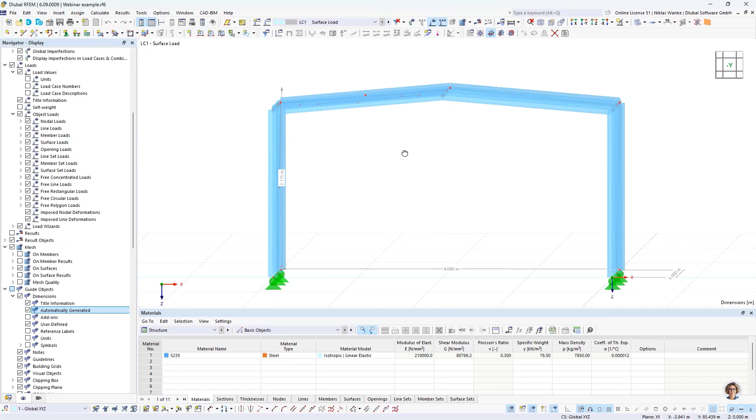Okay, now we can switch to the program, RFEM 6. To show you all possibilities of load transfer, I have prepared a really small and simple model of a small steel hall. We can also have a look at the dimensions really shortly. It's a really small hall, 4 meters by 5 meters — maybe you can park your cars under it or something like that. The hall has a height of 2 meters, and the roof has a little pitch.

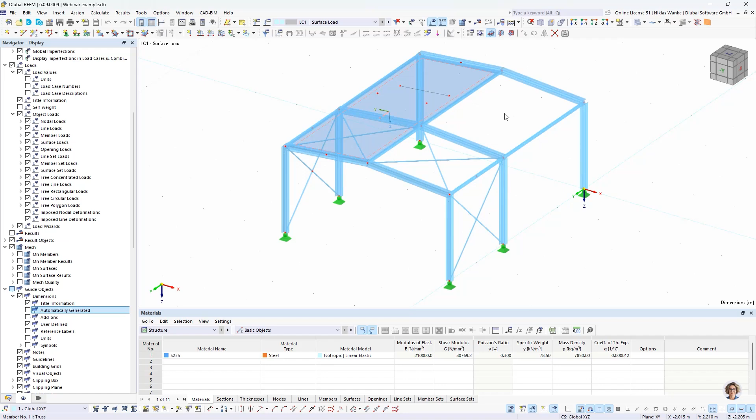The height difference is 1.75 meters between the middle and the rim of the hall. As you can see, I already created one surface for one half of the roof, and this is already a load transfer surface. For the second half of the roof, we will model this surface together so that you can see the process of modeling it.

For that, I will choose the option New Surface with the option Select Boundary. Now we are in the surface dialog, and first of all, we have to select our stiffness type.

This is where the magic happens, because here you can select the load transfer surface, and that's exactly what we want for this webinar.

An alternative would be to select another stiffness type, for example standard stiffness. Then you can create your thickness and your material, and in this case it would be possible to activate the option Activate Load Transfer. This way you can consider the stiffness of the surface, but also do the load transferation.

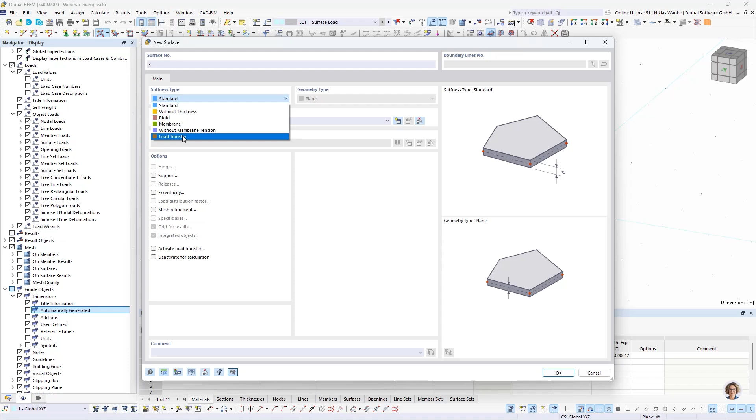But for this example, I would like to choose the load transfer stiffness type, which means that we don't apply any stiffness to the load transfer surfaces, just do the load transfer. As you can see, this option is in this case automatically activated.

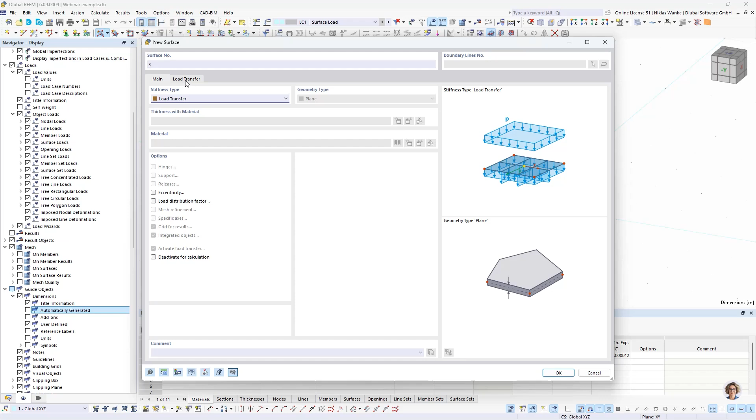By choosing the load transfer stiffness, we get an additional tab, and this is where we can make all our settings for the load transferation.

First of all, we want to have a look at the categories area. The first setting is really important: this is the load transfer direction. Basically, we offer two different methods of load transfer for the surfaces.

The first method is called isotropic FEA, and the other method is called the stripes method. These two methods work completely differently, and we will have a look at both. But first, let us select the isotropic FEA method.

I want to give you a small explanation about how this method works, and for that we can have a look at this picture at the bottom right of the dialog, because in this picture it's tried to explain how this method works.

So this first picture is what you see in the main model. You have your load transfer surfaces, you have probably a connected member or other connected objects, and you have your applied load. In this case, it's a surface load.

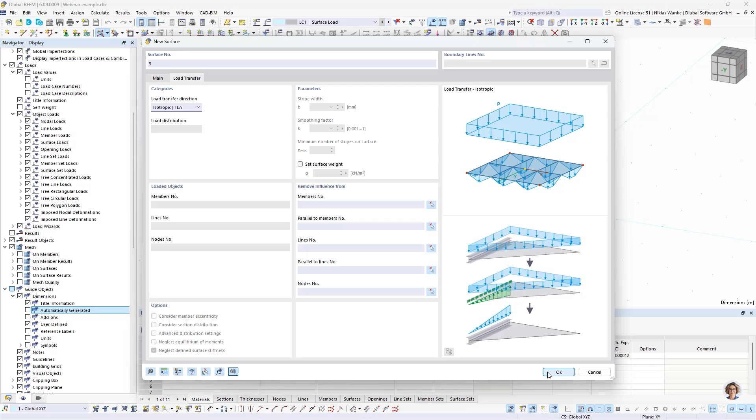And then we have to select our boundary lines so that the surface will be created. So that is done.

And now, of course, we also have to apply a load, because without load we would not see anything. Therefore, I create a new surface load. I want to have a load magnitude of 1 kilonewton per square meter to keep it simple.

And the load direction should be in global, set on projected area. We can apply this and select the loaded surface, which should be the right load transfer surface of our roof.

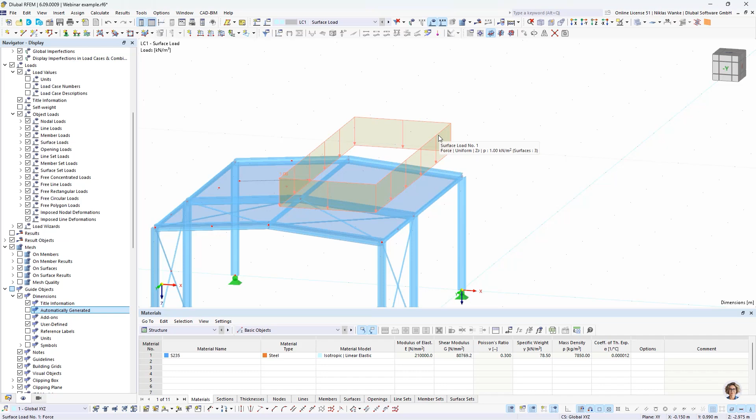Okay, now we see the defined surface load, but basically that's not the visualization or the load that we want, because we want to transfer this load to the connected members.

And to see how this load is transferred, we have to change the visibility a little bit. So we will go to the navigator display, and you will find the setting under Model, Surfaces.

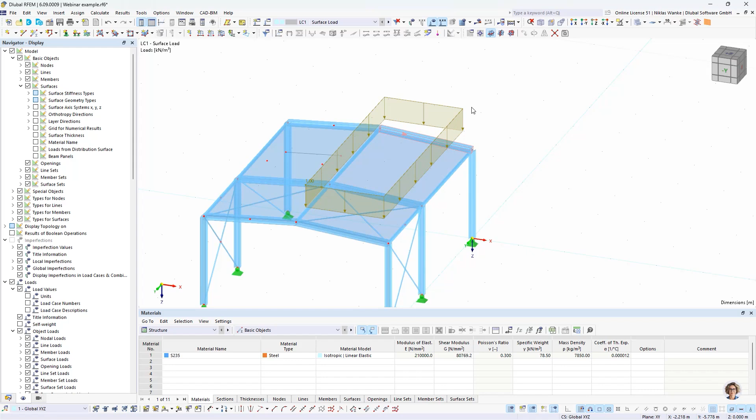And then you can see there's the option Loads from Distribution Surface. And if we activate this option, then we will already see the distributed or transferred loads, and not the surface load that we can see at the moment.

So I will activate it. Okay, we don't see anything. Why is that so? Because the submodel, which I talked about, has not been calculated yet. So to start this process, we have to start a calculation of this load case.

As soon as I start the calculation and the solver starts, you will see that there are two separate calculation processes. That's a hint, because the first calculation process is made for the submodel, and after that we do the normal calculation process for our main model.

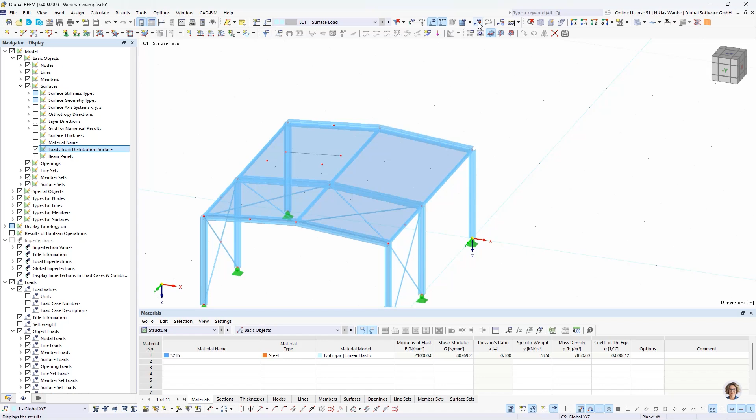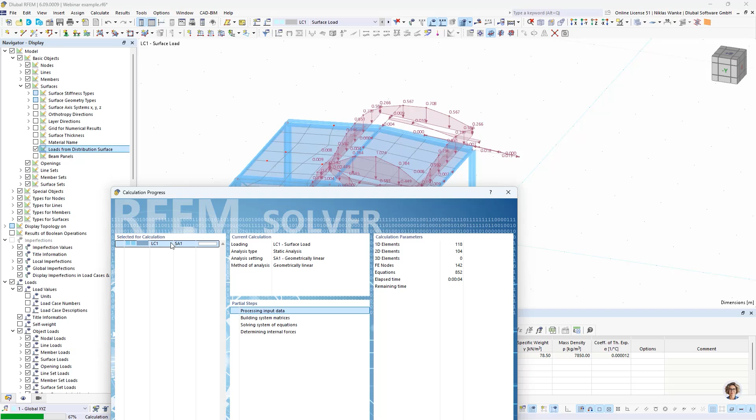So I hit the calculation button. Now the mesh is generated for the submodel, and now the structural analysis or static analysis is done for the submodel. If it's finished, we should see loads - that's the case now. And now the mesh is generated for the main model, and the static analysis is done for the main model. After that, we will receive our results for the main model.

So I think it's clearly visible in the solver that the submodel has to be calculated first, so that we receive these transferred loads.

In this case, also my horizontal bracing has received some loads, and probably that's not the thing that I want. But that's not a problem, because we can simply deselect these members to be loaded. For that, we go back to the load transfer settings.

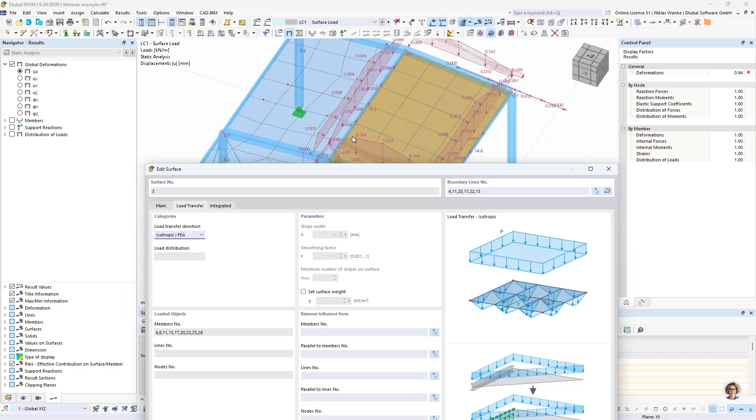Here we can select in the middle part of this dialog which objects should be loaded. By default, all members, all lines, and all nodes which are part of the surface - these are integrated objects and connected objects - all these are loaded by default. But we can remove the influence of some of these objects.

For example, I will choose the members of my horizontal bracing. By clicking OK, we of course have to calculate again, but then these members won't be loaded anymore.

It's also possible to select one member and all members which are located parallel to the selected member, and then you can remove the influence from all these parallel members. Same is for the lines and parallel lines and for the nodes.

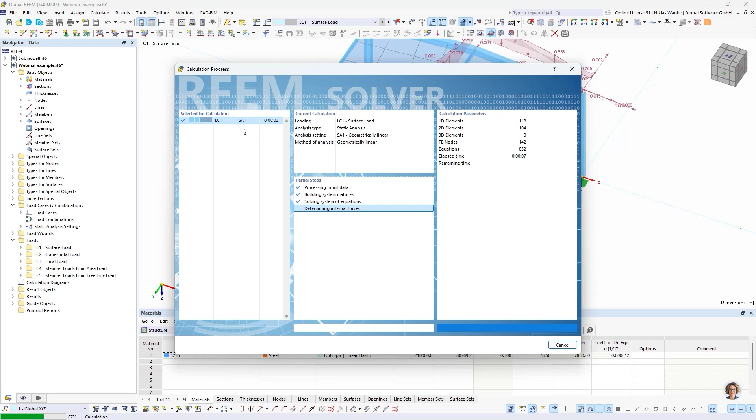Okay, let's calculate this again. And here we see again that it's calculated two times - first time for the submodel and second time for this steel hall model. That was the first time, and now the steel hall is calculated. And now it's finished.

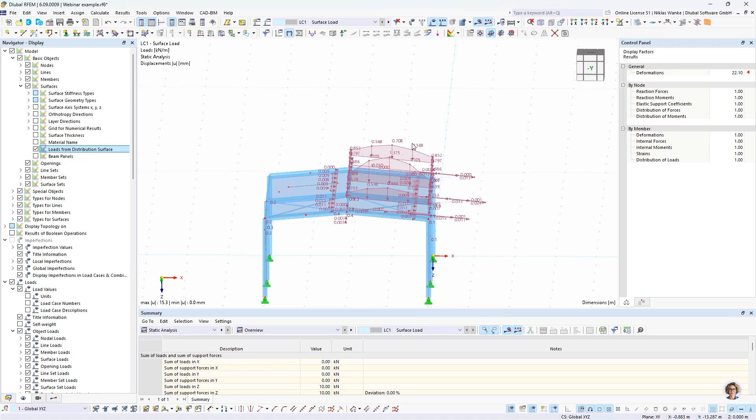Okay, so now we received our transferred loads. I can also switch back to the original load, which is the surface load, and switch back to the transferred load. In this case, we only have member loads. The main load is a vertical load as expected, and we have some small effects which result in horizontal loads.

Most likely you don't have to pay any attention to these loads because they are really small, like 0.001 or 0.02. So that is just an effect of the FEM calculation.

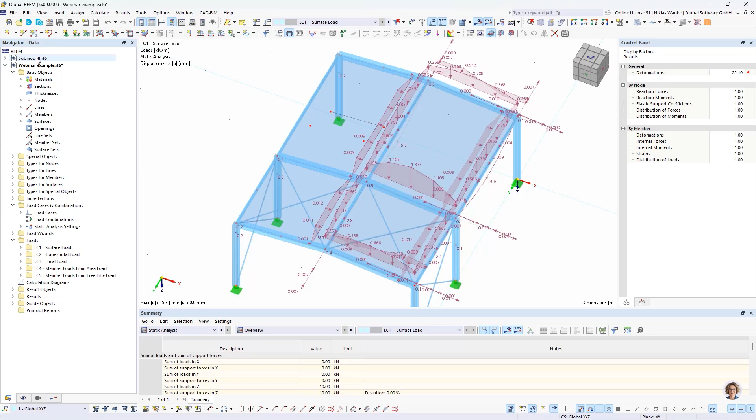Okay, I would like to show you the submodel as well. I prepared this in a separate model of RFEM 6. So I just created the submodel of this one load transfer surface. As you can see, we also have the roof pitch, we have the surface load on the surface.

In this case, the members, as I said, are now modeled as fixed supports. The definition of the surface is a bit special, so it's not a complete rigid surface, but it's a surface with the stiffness type standard and defined stiffness matrix.

So let us have a look into the stiffness matrix. We will see that the different stiffness coefficients are set to a relatively high value, like 1e+10 or 5e+9, or maybe here also 1e+11. So this is a really high stiffness, but it's not a complete rigid surface - it still has a finite stiffness.

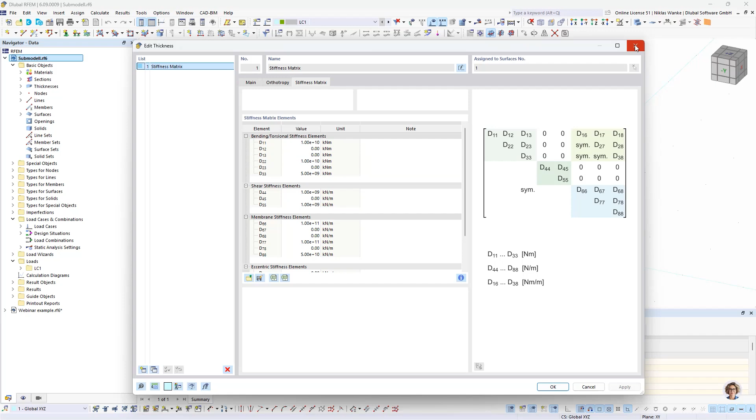The reason for that is because this leads to a better result or to a better load distribution. So that's why this load transfer surface is set to this stiffness in the submodel.

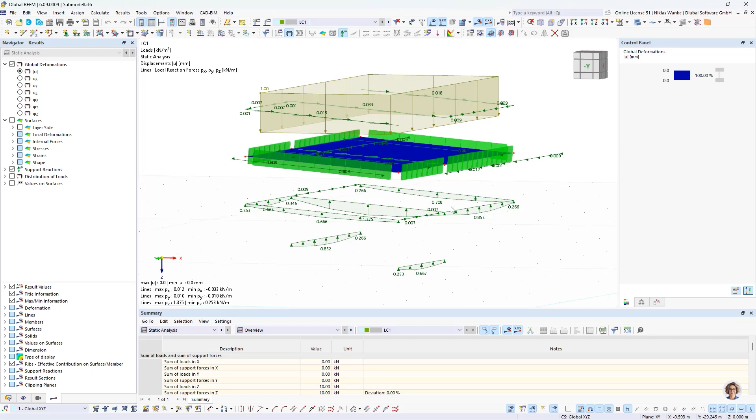And if we calculate the system, then we will receive the support reactions of these fixed supports, and this will be exactly the load which is applied in our main model. So for example, we can remember this value here - this is the peak value of the middle rafter.

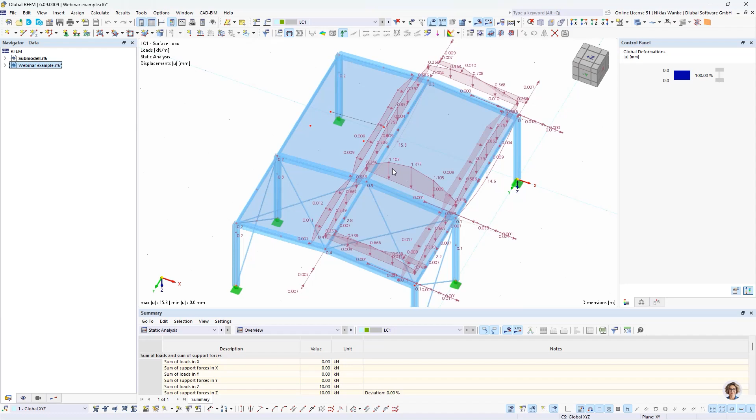So in this case, we have 1.375 kilonewton per meter. And if we switch back to our main model, we will find exactly this value, which is 1.375 kilonewton per meter. So yeah, with that, I think we have proved that it is the same.

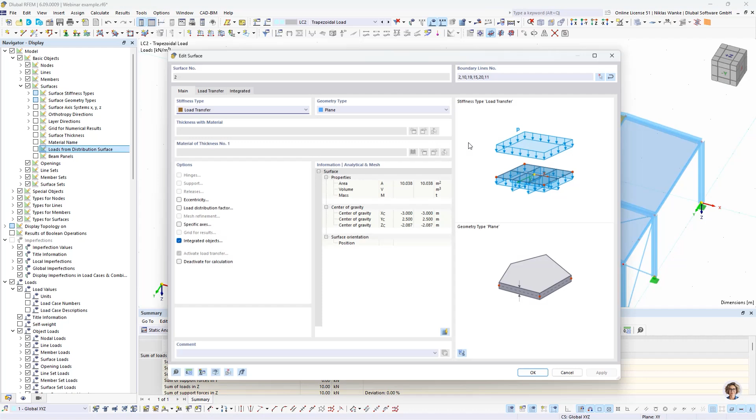Okay, so let's go back to the definition of the load transfer surface. This time we will have a look at other methods, which is the stripe method. Therefore, I will go to a new load case, the second load case, where I defined a trapezoidal load for the left side of the roof. Let us have a look at the load transfer surface, which I have already defined.

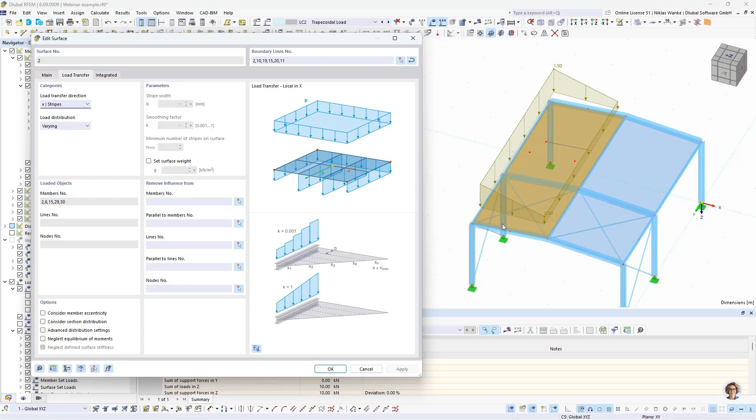So we go back to the tab load transfer. And in this case, we see we have defined X stripes. This means that the surface is divided into many stripes along its local x-axis. If we strive over with our mouse, we can see the local x-axis is located in this direction. So the surface will be cut or divided into many stripes, like I am showing with my mouse. You can imagine it like if there would be many single beams lying in this direction on the roof, and every one of these stripes is loaded with this trapezoidal load. Always if such a stripe cuts a member, like these rafters or the horizontal bracing, then these members will be loaded by the stripe.

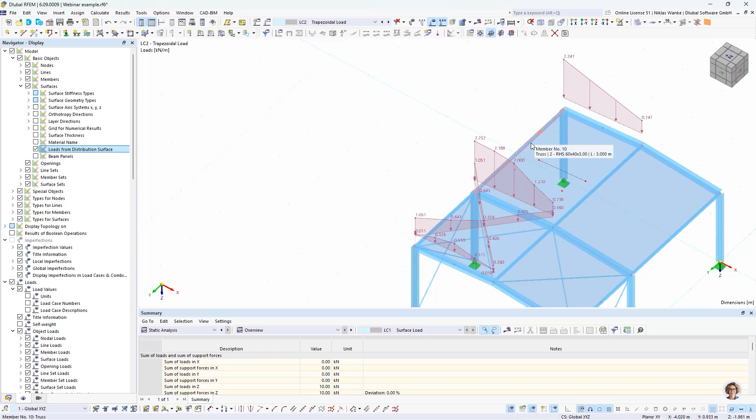So I will go on. First, I will select the loads from distribution surface so that we can see the result of the load transfer. As we see now, the horizontal bracing is also loaded and our rafters. What is not loaded is the purlin of the rim and of the middle. The reason for that is because the purlin is completely parallel to the stripes direction, so it does not receive any load. If we change the stripes to Y stripes, then the purlin should be loaded and our rafter should not be loaded anymore. So I will change it and apply. And now we see the purlin is loaded, but the rafter is not loaded anymore.

So these are the two options that you have to divide the stripes in X or Y direction. And the third possibility would be to mix these two stripe directions. So in this case, you have X and Y stripes, which is basically a mix of the two methods. If we select it, you will see that now all members, regardless of their direction, are loaded.

Another option that comes with the stripes method is the load distribution. Normally it's set to varying, but it's also possible to set the load distribution to uniform, and in this case you will always receive a constant load distribution on any object. So if I set it to uniform, we will see that this linear load distribution will change to a constant load distribution. In some cases, this can be an advantage to keep the system a bit more simple, maybe also to prove it easier if you calculate it by hand. But of course, the load distribution varying would always be the more exact method.

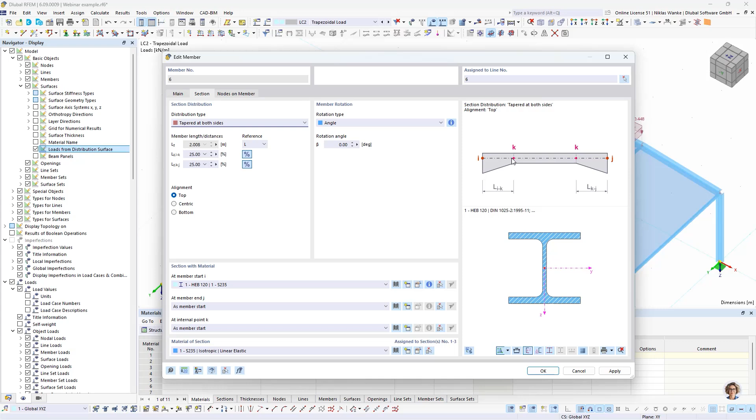So in this case, the axis would have a little pitch. This can lead to small differences between the load transferation, but the difference should not be too big for most cases.

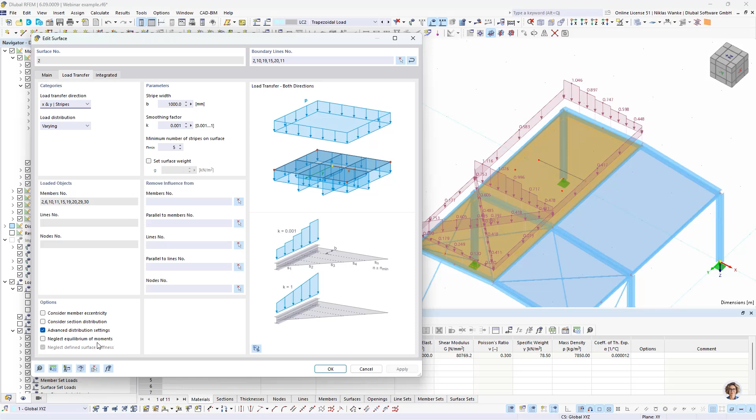One last option is the option neglect equilibrium of moments. By default, the setting is deactivated, which means that the equilibrium of moments is considered. I can show you that in my third prepared load case. Here I defined some local loads on our load transfer surface. I have two nodal loads, and I also have a free line load and a free rectangular load.

This could probably happen if we have, for example, air conditioning on the roof, or if there are some pipes which are connected with the roofs. So these could be cases where we have such types of loads on our roof. And of course, it's also possible to transfer these loads which are applied on the surface to the connected objects like these members.

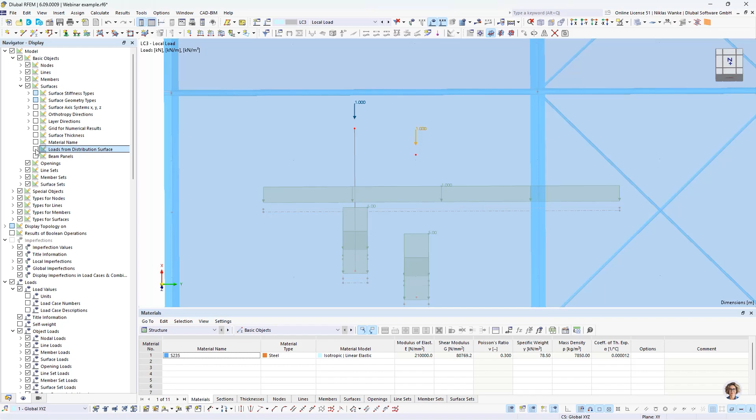Normally, the equilibrium is considered. This means, for example, for this load, it's located at 2/3 of the span of this roof. So it would mean that 2/3 of the load would go to the right rafter, and 1/3 of the load would go to the left rafter. This is the case, as you can see. Here we have one moment.

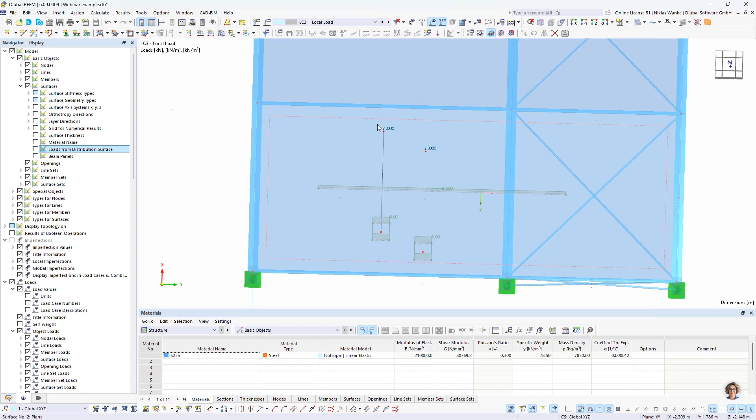Same is for all other types of loads. But now, if I activate the option neglect equilibrium, then the equilibrium does not matter anymore. So what does it mean in detail?

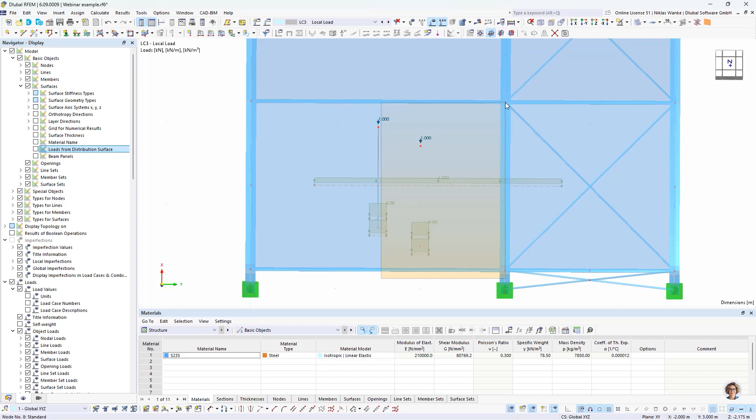It means that now you can imagine there's a cut done in the middle of this span between the left and right rafter. Every load located on the left side of this cut will be transferred to the left rafter, and all load located on the right side of the span will be transferred to the right member. This would mean, for example, that this free rectangular load, which is completely located on the right side of the span, will be completely transferred to the right member. So that's different to the case before.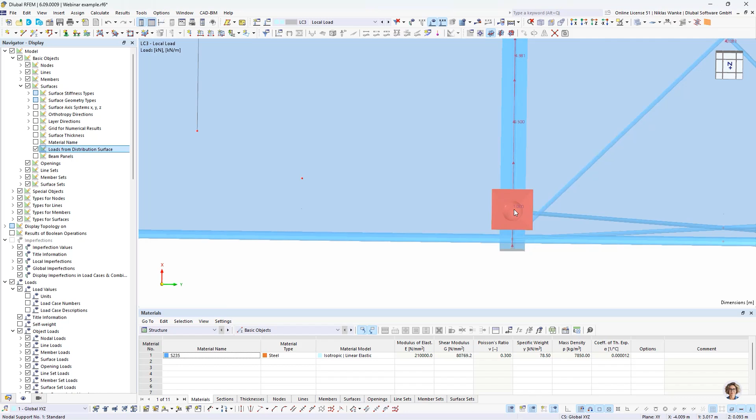If I activate the load from distribution surface, we will see this. Now we have the complete load on the right rafter of this rectangular free load, and on the left side we don't have any load in this case. If the load is located completely in the middle, then it will still be like before, so we have half on the right and half on the left.

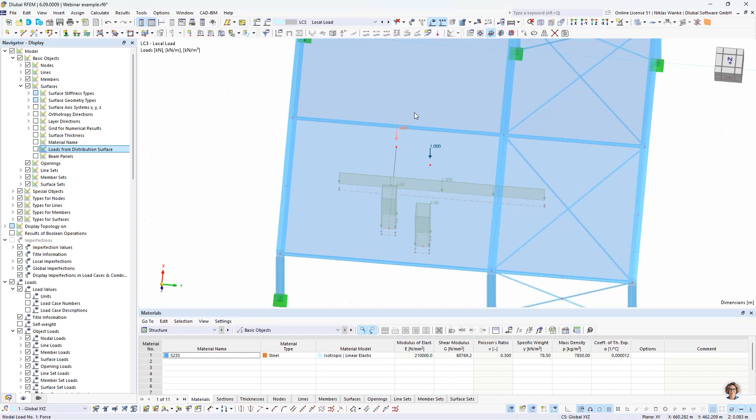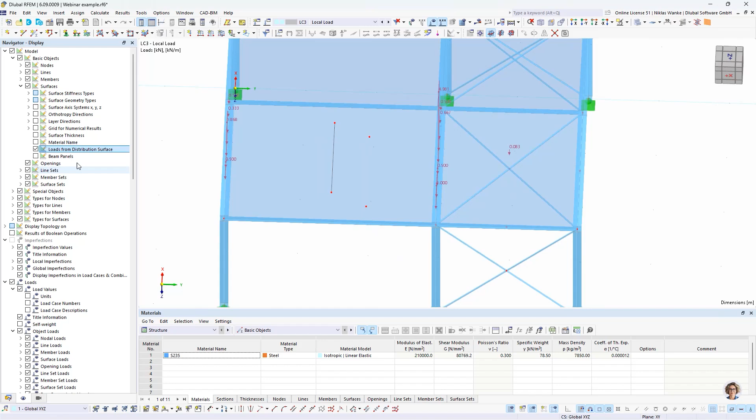There's also one special case, because for these loads, which are nodal loads, the equilibrium is always considered correctly, also if the option is activated. So also for this load, which has eccentricity to the middle of the span, the loads are still distributed 2/3 and 1/3. But for all other loads, the equilibrium won't be considered anymore in this case.

I just remembered one thing that I would like to show you again. By now, we always only transferred the surface load on this load transfer surface to members which are connected to the surface. But I would like to show you that it's also possible to transfer it to lines or to nodes, like shown here.

Now it's not transferred to these objects. The reason for that is because these nodes and this line are no structural objects. It's just geometry, and it does not have any stiffness or something like this. So that's the reason why the loads are not transferred.

But if I, for example, put such a nodal support on this node, then it will instantly also receive a load. Same is for the line. I could put a line support there, and then we will see, okay, now also the line has some loads transferred to it.

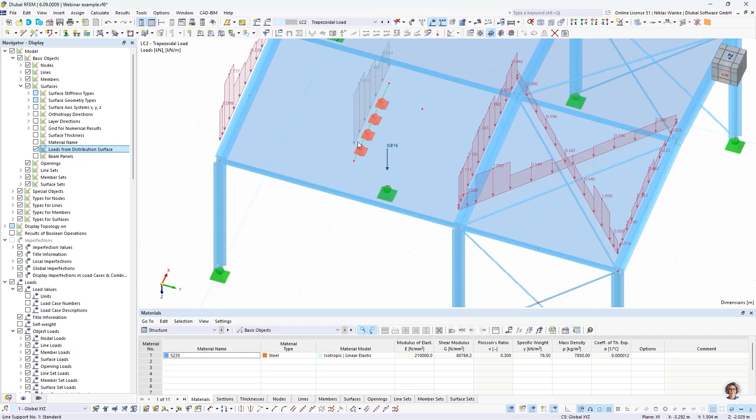Of course, that's also possible, for example, if you have a wall which is connected to the load transfer surfaces in this line, then also the wall will be loaded. Same for the nodes. If we put a column on this node, let me do it really quick, then also this column, of course, has a stiffness and will be loaded.

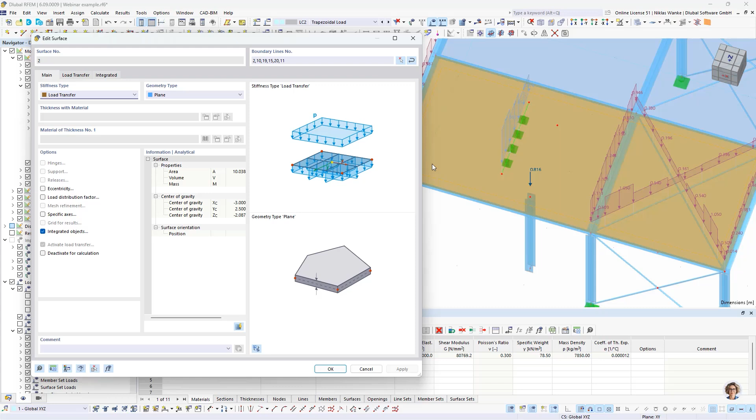One thing you have to keep in mind is that only the load of the stripe which the node or the line is directed in will be transferred to the column. This means if you select the stripes method in this case, it really depends on the stripe width. Now we have a very big stripe width, we only have 5 stripes, so the column is getting a relatively high load.

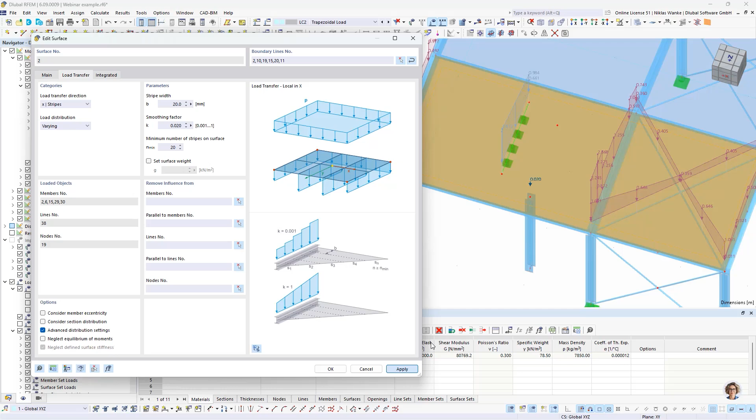But in the normal default setting, let me change it back to the default setting, we only have a stripe width of 10 millimeters, and this means that the column will only receive a really small load. If I press apply, you see now it's only 0.02. And if I double up the stripe width, we will receive the doubled loading, which is 0.04 now. So that just means that the stripe width has a big influence to the loads on columns in this case.

This is why I would recommend to use the isotropic method if you have some structure like this.

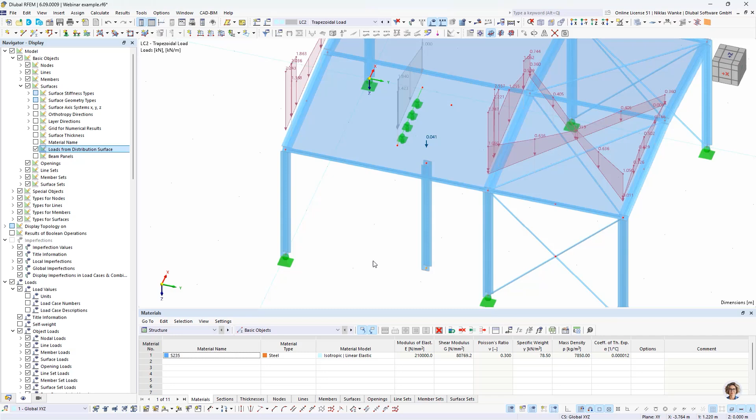Okay, let us remove the column and the line support, because in this case it would not make much sense to have a column here. And now we are back to the default system.

One last thing that I would like to show is that load transfer surfaces can also be used for other geometry types, so you don't necessarily need a plane surface. You can also use curved surfaces like quadrangle. Load transfer works the same, and it's still possible. And I think that's a really handy feature and a big advantage.

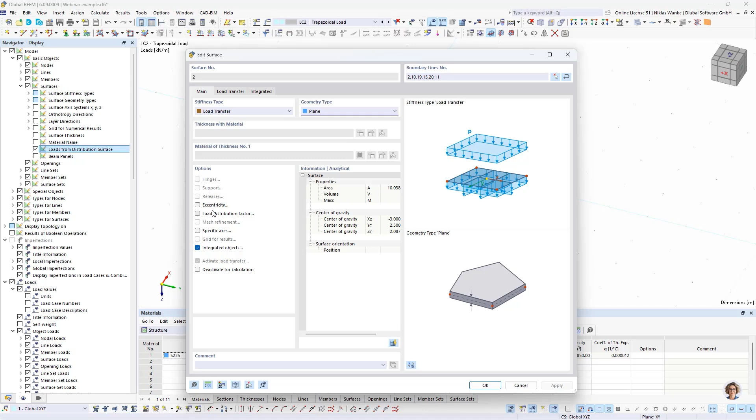And the other thing is, that's basically the last thing I want to explain for the load transfer surface. This is the load distribution factor. That's an additional option for the load transfer surface, and if you activate it, you can define load distribution factors if you want.

So by changing the factor for some members, for example, I can say this member should receive a higher distribution factor. Maybe we choose 1.3 or something like this. Then we will see that the transferred load will increase. So I have to apply it, of course. And now you see the load has gotten bigger.

Be careful a little bit with this function, because if you increase or decrease the distribution factor, you will also increase or decrease the sum of the loads. So you will receive a higher surface load or a higher load at all. This means that you increase the absolute values of this load, and it's not relative to the sum of the loads.

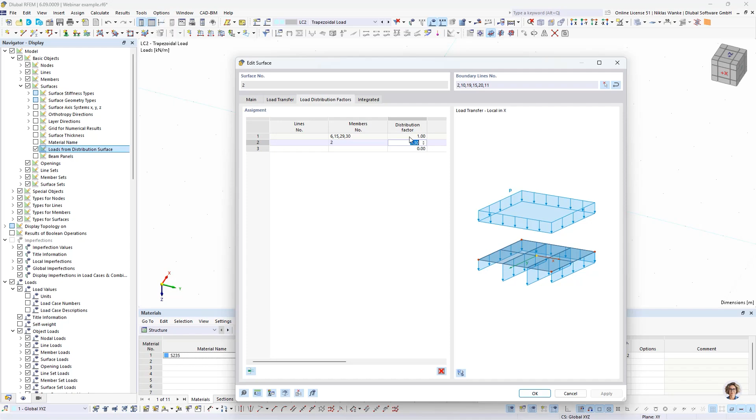But it's, in my opinion, also a really useful feature if you want to kind of manually have an influence on the load transferring. Okay, that's already everything I wanted to explain for the load transfer surface.

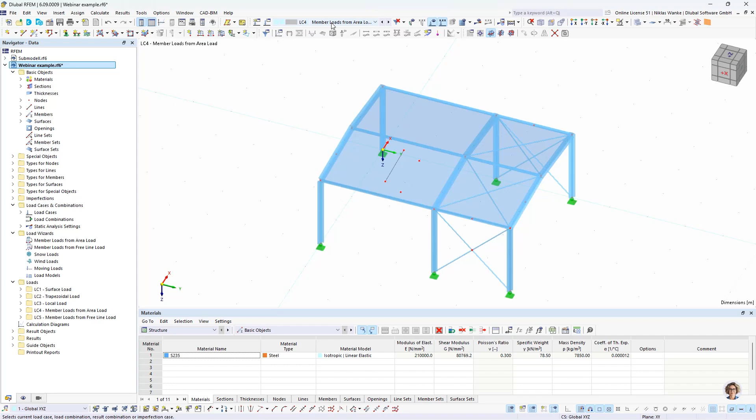And as I said at the beginning, we also have two other points we want to have a look at today. This is the two load wizards: member loads from area load and member loads from free line loads. To show that, I will switch to load case 4 that I already have prepared. I want to use just this load case to show you the first load wizard, member loads from area load.

For example, we could imagine that we want to apply member loads from an area load, which is the result of a wind load on our steel hall wall. Therefore, we can create a new load wizard by double-clicking here, or by right-clicking and selecting the option New Load Wizard.

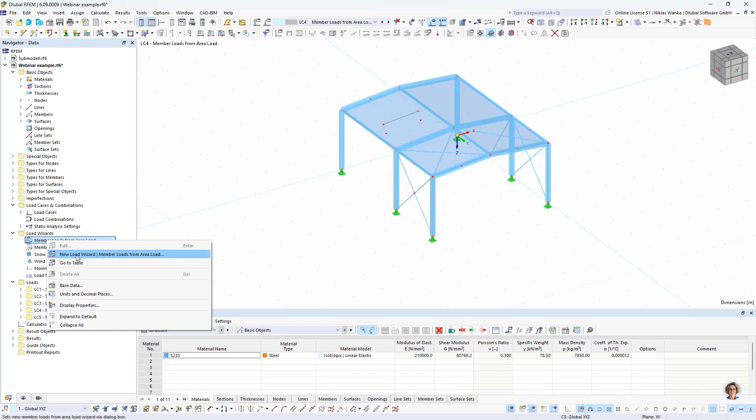Now we see the dialog for the definition of the member loads from area load. This load wizard has an advantage: we don't have to manually define our surface, like we had to do for the load transfer surface. So we don't need any surfaces at all. That's especially an advantage if you are working with RSTAB, because there you don't have any surfaces available, and you can still use the load wizard member loads from area load.

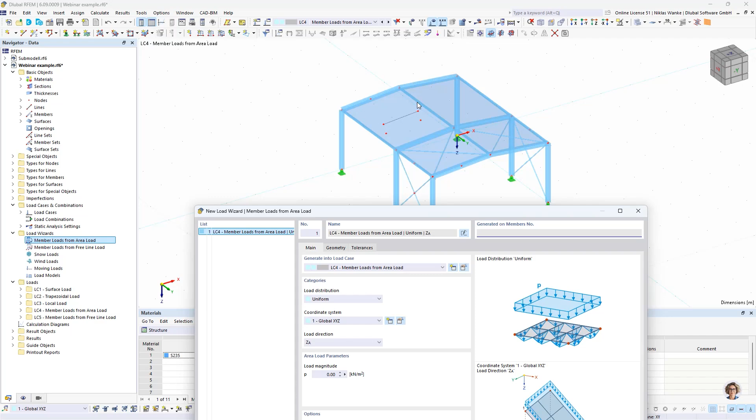The disadvantage of this load wizard is that you can only apply surface loads. For the load transfer surface, you have seen that we can also apply, for example, nodal loads and free loads, so we can apply every type of load to the surface. For the load wizard, only surface loads.

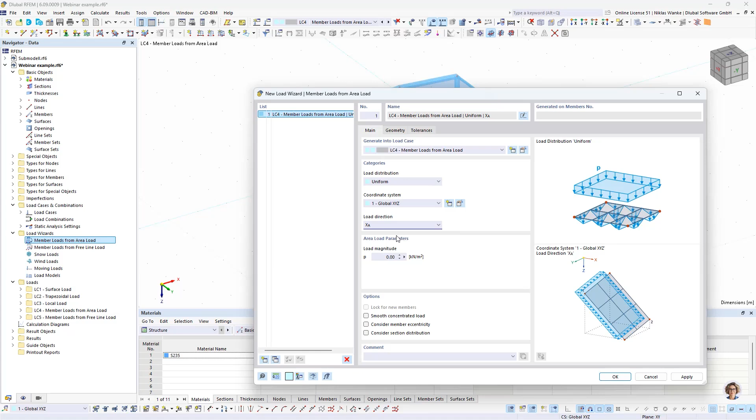Okay, let us generate our load. We want to generate it in load case 4, and we want to choose the uniform load distribution in global X direction. So I choose global X. And the load magnitude should still be 1 kilonewton per square meter to keep it simple.

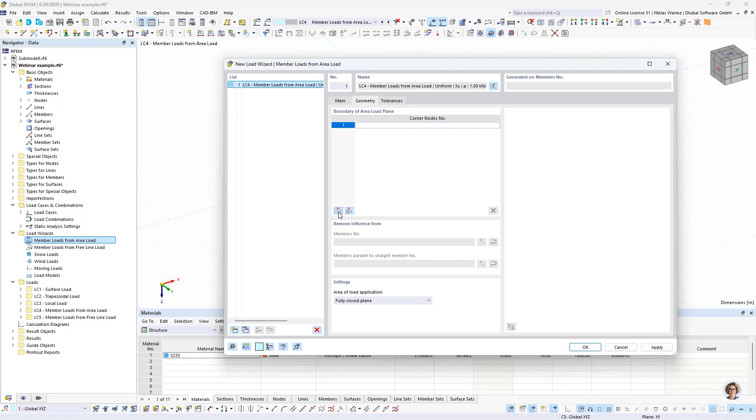And there's one thing we have to define to finish the input for this load wizard, and this would be the geometry of our surface load. Therefore, we can pick our corner nodes for the area or surface we want to apply the load on. I think the easiest way would be to pick the nodes in the main model. So I select the corner nodes here of our wall of the steel hall.

And now we are ready to go and can press OK. And that is the result. Normally, or by default, we still see our defined surface or area load. But again, it would be interesting to see the transferred member loads, because these are the real loads that are considered for the static analysis.

To achieve this, we go back to the navigator display, scroll down a little bit to load wizards, and then member loads from area load. And here we can choose the option display separately. And now we see the load distribution on the members. Alternatively, you can also select the load wizard load, right click, and choose display separately. It's basically the same.

Okay, now we see the loads, and maybe you could wonder why is there such a corner here, and here's also a little corner on this load. I can explain why this is happening.

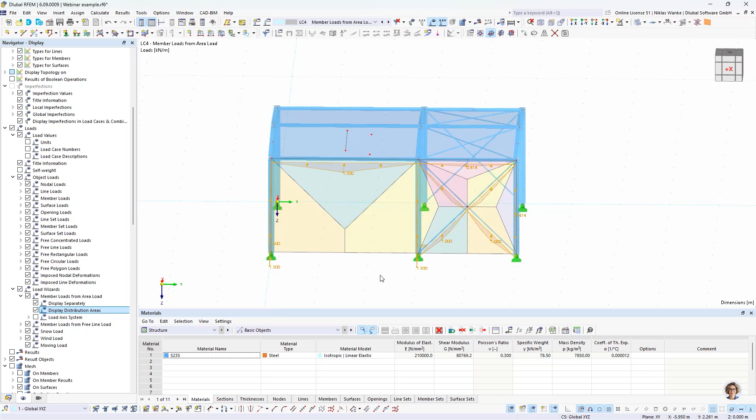In this case, it's really useful to have a look at the distribution areas of this load wizard. This is possible to show in RFEM 6, and I think it's a really powerful or cool feature. To achieve this, we have to go to the navigator display and select the option display distribution areas. So I enable this, and I still don't see anything because I first have to select the load wizard that I want to show the load distribution areas for. So now I select it, and we get a really nice overview of the distribution areas. By seeing that, it will be a little bit clearer why we have these peaks or corners in the load.

Now it makes much more sense, and it's a good visualization option in my opinion.

Okay, let us go back to the definition of this load wizard, and we want to have a look at the additional options.

These two options will be familiar to you because it's the same as for the load transfer surface. Also here you can consider the member eccentricity and the section distribution if you want. So it's completely similar to, or identical to, the load transfer surface.

Then we also have this first option, which means lock for new members. By default, it's deactivated. That means if I would create a new member now, like an additional column, then this would be synchronized with the load wizard, and also this additional column would be loaded, or the loads would be transferred to this column or any new member. If we check this box, then we can lock this state we see here, and I can add any new members in this plane and they won't be loaded.

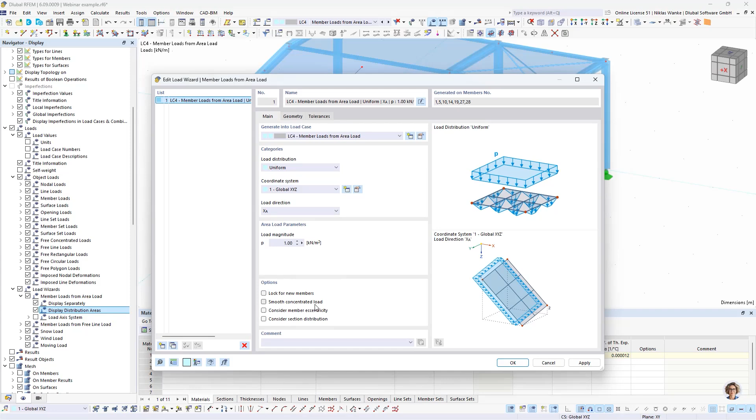The smooth concentrated loads option, I will show this in some minutes, but first of all, we will switch over to the geometry tab. And here we also have the option to remove the influence for some members.

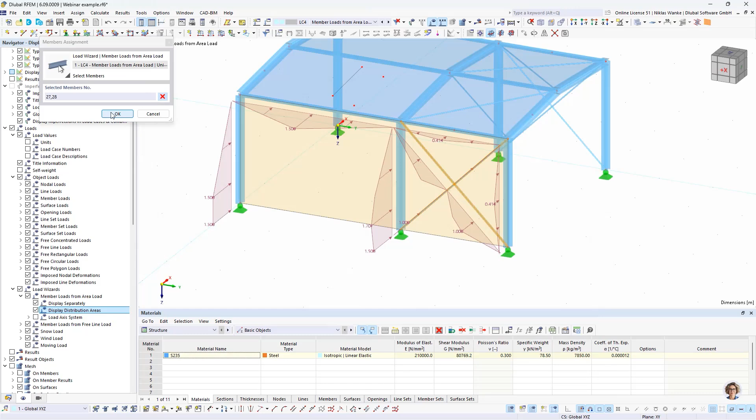It's also basically the same as for the load transfer surface. So for example, if I want to remove the influence for the horizontal bracing, then I can do it with the selection. I can apply it, and then we see, okay, now the horizontal bracing is not loaded anymore, but the other members receive a slightly bigger load instead.

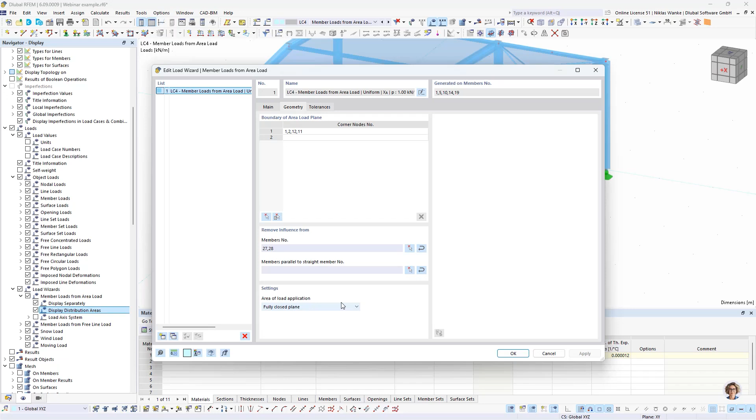Then there's also a really powerful setting, in my opinion, and you can do many things with it. This is the area of load application. By default, we apply the load on a fully closed plane. This means that this complete plane has an area load, which has to be applied on the members. The second option would be to only have an empty plane and the load only on the members.

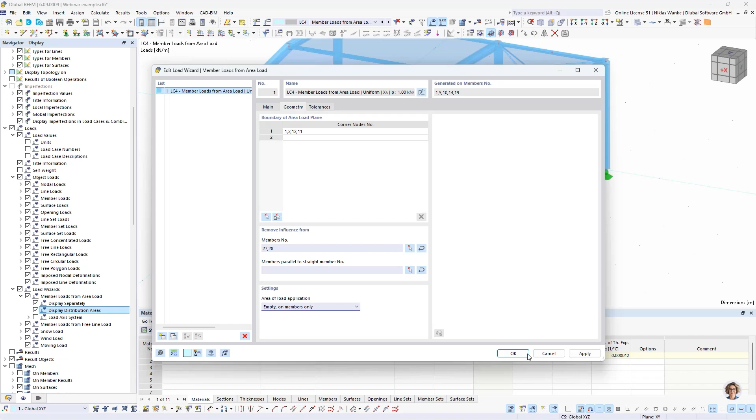So let me choose this option and apply it. First of all, we see the loads are getting much smaller, and that's because now only the surface where we have our members is loaded. For example, you can imagine that this hall is open, so it has not a wall, only the columns, and we have a wind load. So the wind can flow through the hall, and it only creates wind pressure on the members. This would normally be the use case for this option.

What is really cool about it is that the exact surface of the section is considered. This means that the columns with the bigger cross-section also receive a bigger load than the purlins with a smaller cross-section.

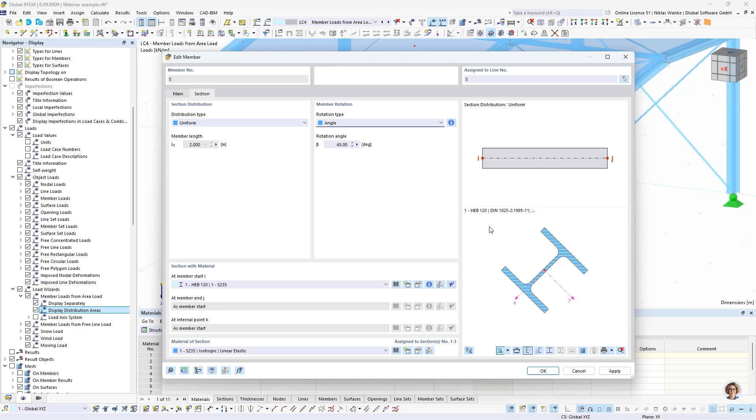What is also considered is the rotation of the member. So if I, for example, define a rotation of 45 degrees, then we will have a bigger load distribution area for wind loads, for example. As you can see, the load will increase to 0.17 kilonewton per meter. With the unrotated member, it's only 0.12.

So that's a really powerful tool, in my opinion. Especially for wind loads, this can be really helpful, for example, for truss systems and so on.

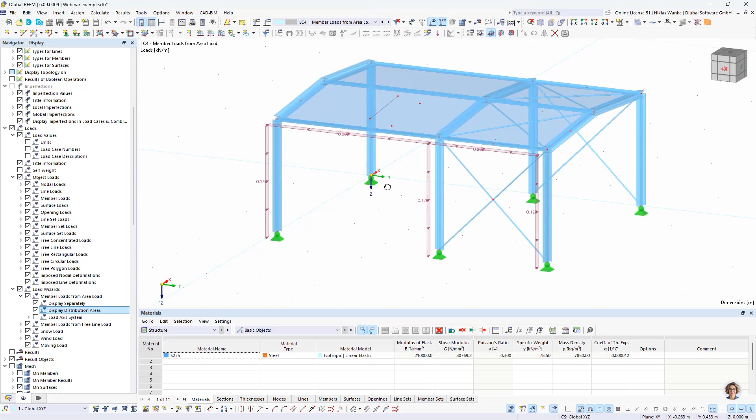Okay, to show the other functions for the load wizard member loads from area load, I would like to create one more load wizard. Basically, it's possible to create as many load wizards as you want in the same model. It's not limited to one. So I will create a new one.

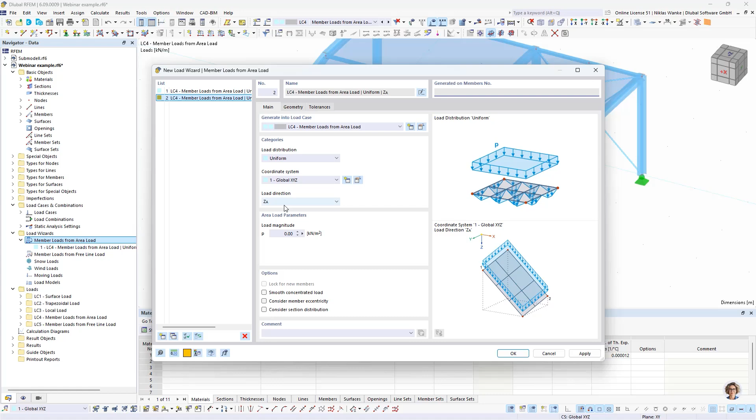This time I want to have global load direction in ZP direction with 1 kilonewton per square meter. And I will pick a geometry which is a bit different or a bit special. So I pick, first of all, the corner nodes of our left side of the roof. But here I will do it a little bit special. I pick this middle node of the surface and then I complete the surface.

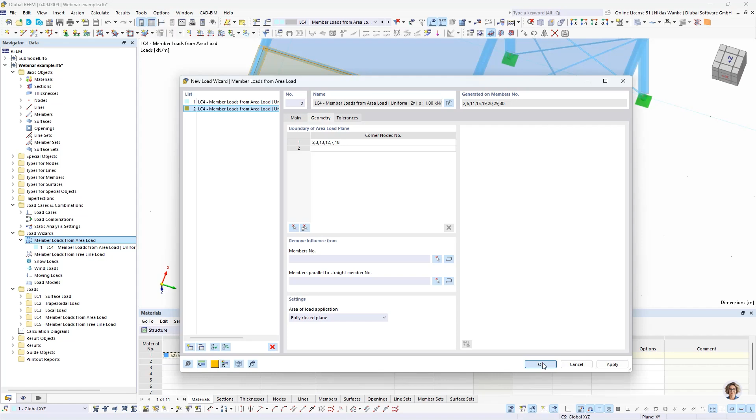So now we see that this area does not receive any loads. And we also see that the purlin, which is outside of the load distribution area, does not receive any loads. This means that only members in this plane are loaded.

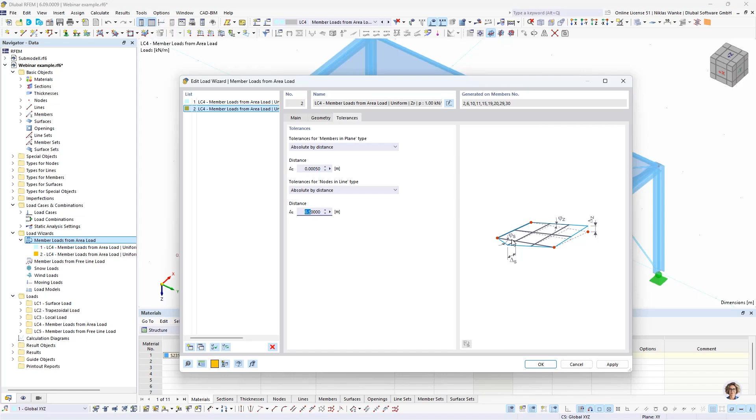But we can modify this a little bit by modifying our tolerances. For example, I could say I want a tolerance of delta S of a really big one, like 0.5 meters. This is already a really high tolerance. This would mean that also members which are located 0.5 meters outside of the plane will be considered as well. So let us apply it.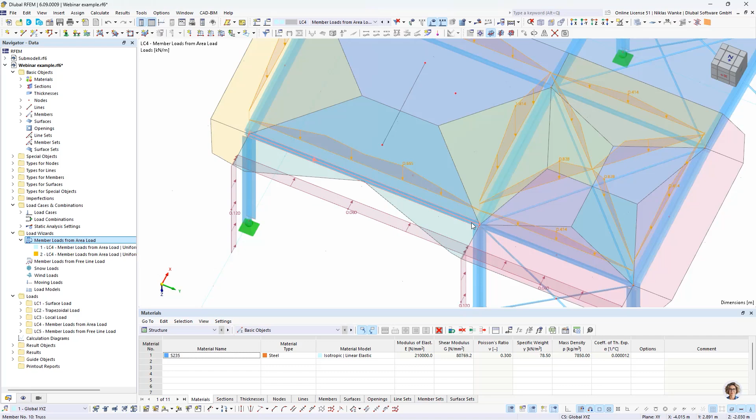And now we perfectly see again on this load distribution area that we have such a radius of 0.5 meters outside of our predefined plane. This means that every member which is located in this tolerance area will also be considered for load distribution. So in this case, this purlin is located inside of the tolerance area, which means it receives loads.

If I lower the tolerance a little bit, for example to 0.3 or maybe 0.4, then we can see that a small part of this member is outside of the tolerance area, or of the load distribution plane. And we see that this part of the member is not loaded anymore.

In this case, we have such a bit strange nodal loads on the member. This is caused because we have kind of a concentrated load in this location. If you don't want to have these nodal loads, you can activate the option smooth concentrated load. That's exactly for this case. If you receive some loads like this, you can, if you want, smooth them, and then the loads will be considered within the member load.

So the member load will increase a little bit, but the nodal loads will be removed. So it's up to you. You can do it if you want. Probably it will be a bit of an advantage for your system. You can decide if you want to apply it like this, or if you want to consider this as nodal loads like it's done by default.

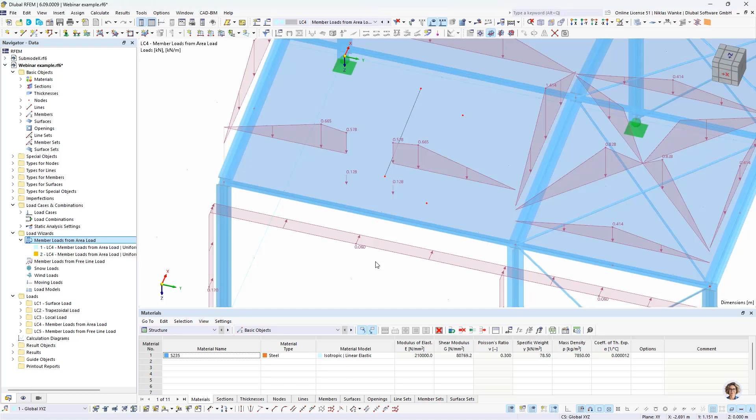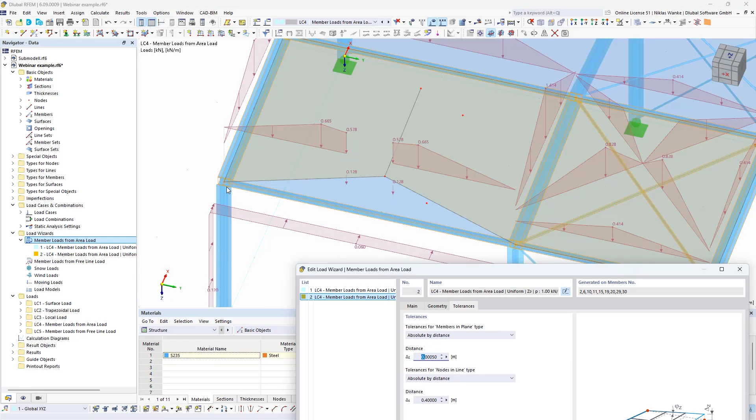I only talked about the second tolerance option, but there's also this first one, and this is for members which are out of the plane. So for example, if I would have a member which is a bit delayed in the global Z direction, so it's a little bit higher or lower, not directly in the plane that I have defined, then we can change this tolerance to a higher value to also consider these members outside of the plane. So these are basically the two tolerance options that we have available.

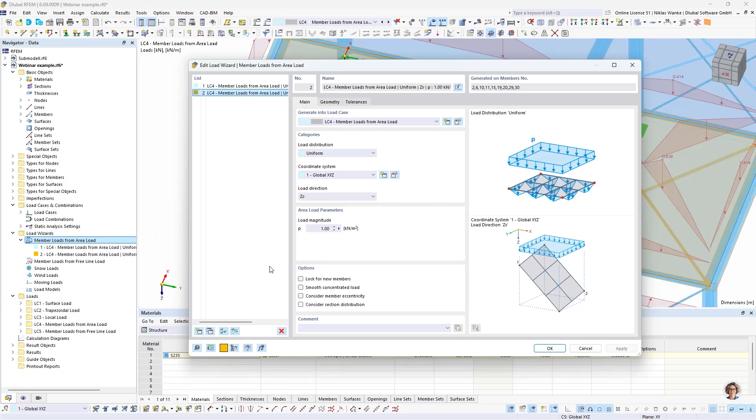I think that would already be everything for the member loads from area load wizard. So we can go to the last one, which is the member loads from free line load wizard.

Let us create a new line load. As you can see, it's relatively similar to the first load wizard. The difference here is that we don't apply a surface load, but we apply a line load, as you can see on this small little image.

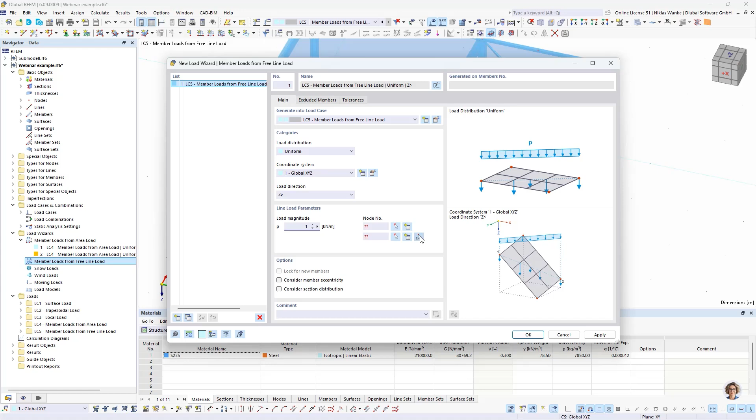For that, we again have to say we want to define it in load case 5. We want a uniform load distribution in global Z direction. Of course, we also have to define the load magnitude, and now we need to define the start and end node of this line load. I think the easiest way to do this is by picking it in the model. Best way to do this is by pressing this button, because then you can select both nodes at the same time. So I picked the first and the last node.

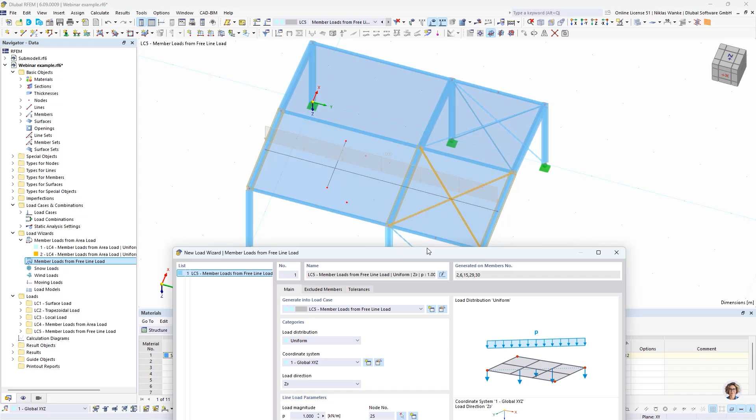You could imagine, maybe if there is a pipe or something on the roof, or technical equipment, then this could be the use case for such member loads from free line load wizard. If you have, for example, a pipe which goes from start to end of this hall, then it has a constant load over its length. But it will be connected only with the members probably and not with the surface. So this would be the perfect use case for this load wizard.

I don't have to explain too much about the options because it's exactly the same as for the load wizard before. We can also lock this for new members so that they won't be loaded, and we can consider the member eccentricity and the section distribution if we want.

Let's apply it. And also here we can say, okay, display separately. And then we see all our punctual member loads that have been transferred to the members. Basically all members that are cut by this line are considered for load distribution.

But also here you can define tolerances. For this load wizard, only the second tolerance is relevant, so the first one does not have any impact. But if you want to add a small tolerance, you can do it by changing this value. This would mean that members which are not directly cut by this imagined line can also be considered.

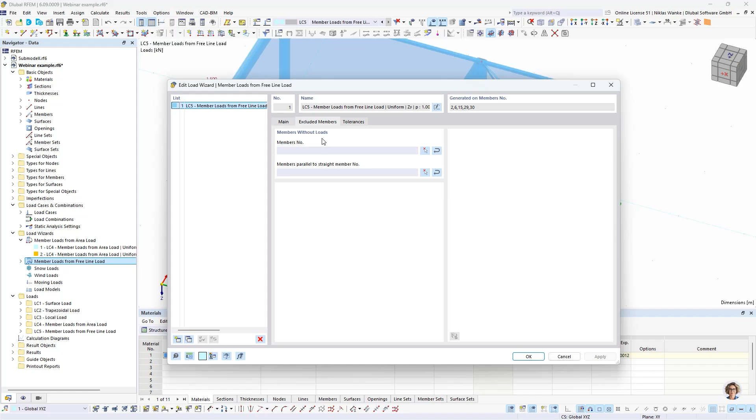And as you are probably already used to it, you can also select that some members should not be loaded. So we can, for example, say, like always, we don't want to load our horizontal bracing, and apply this. So now the loads are only applied on the rafters.

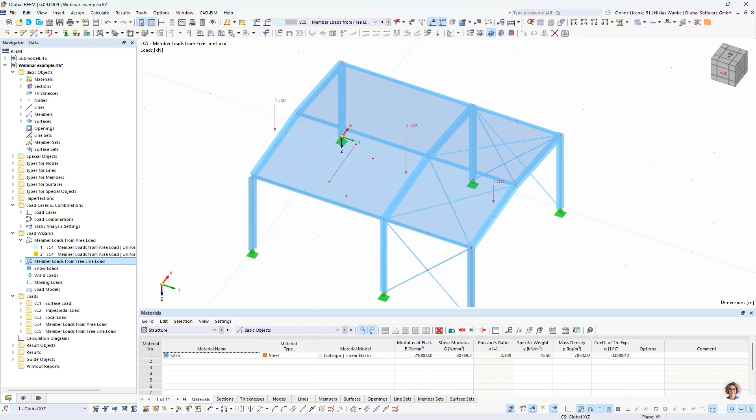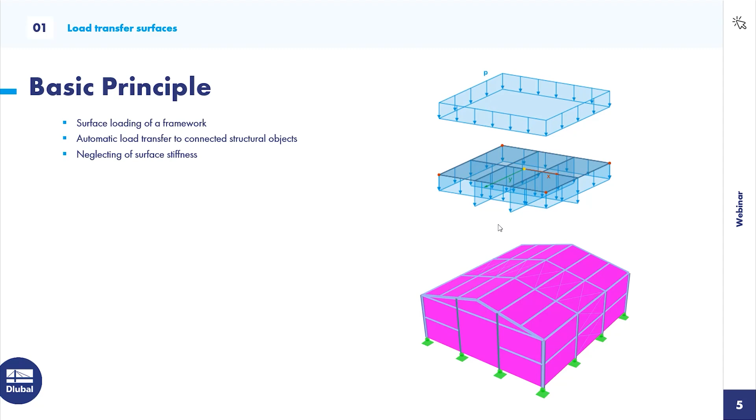Okay, so that should be it for all three possibilities of load transfer. And one last thing that I would like to talk about with you is a small outlook for planned features in the future. For that, I will switch back to the PowerPoint presentation and go to the next page. It's not that much which has to do with the load transferation, but there are two things that I would like to tell you that we are planning at the moment.

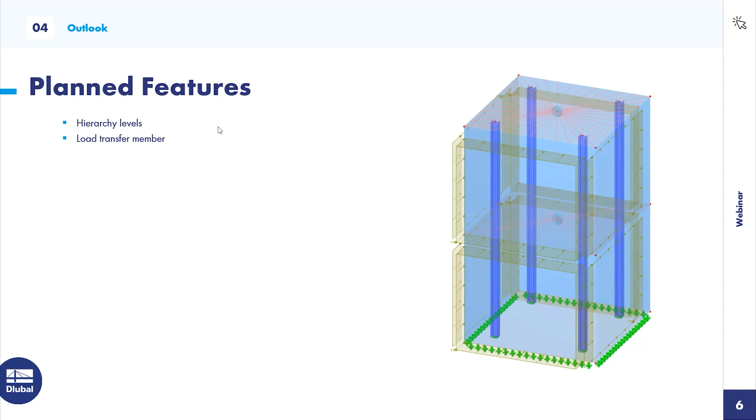The first one is the option of hierarchy levels. Part-wise, this is already included in RFEM 6 in the actual state, for example, for the building model. So on the right side, you can see this image. This is a typical building model. So we have walls, we have ceilings, and we also have columns.

And the problem, or the task, is that we have horizontal loads on the walls, and these loads have to be transferred first to the walls, from the walls to the ceiling, and from the ceiling to the columns. So these are multiple steps for load transferation, and for that we need something like hierarchy levels, so that we can define a priority of which load transfer surface should be considered first and which one next.

For the building model, it's kind of clear how this has to be done. In this case, the walls have hierarchy 0, so load is distributed on the walls. We calculate the support reactions of the walls and apply it as external loads on the ceiling. Then these external loads of the ceiling are transferred back to the columns. So that's the way how it works in the building model.

But this could probably also be a useful feature in general, not only in the building model add-on, so probably we will receive it as a feature in the future. So you could have something like a construct of multiple load transfer surfaces and define the hierarchy, which load transfer surface should transfer the loads to the next connected load transfer surface. So something like this could happen in the future.

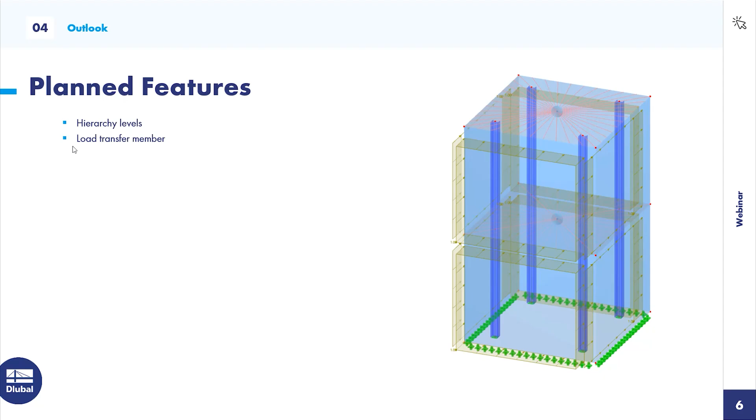Okay, with that, this was everything from my side. I hope you could learn something new for this big topic of load transfer, and I also hope that you are now able to use it by yourself and have an advantage of this feature for your own projects. Okay, now I have said everything from my side, and I would give back the speech to my colleague Andreas.

Thank you, Niklas, for your presentation.